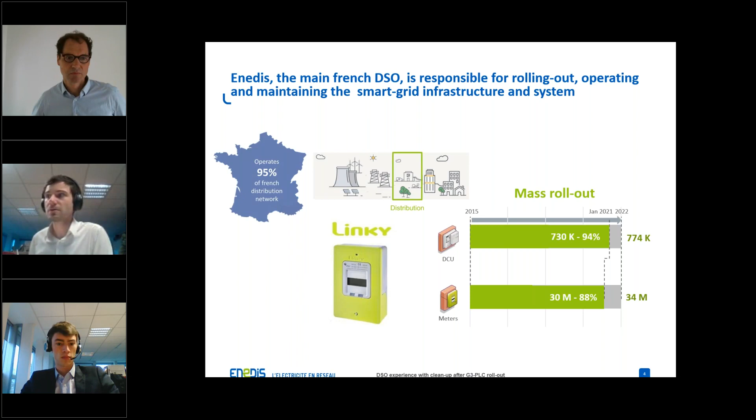Yes, so we have a specific Linky information system. It's not MDMS or HES that you can find on the market. We designed this AMI. It is custom made by Enedis, and all the DCUs communicate with the mobile network. So it's a UMTS or LTE communication.

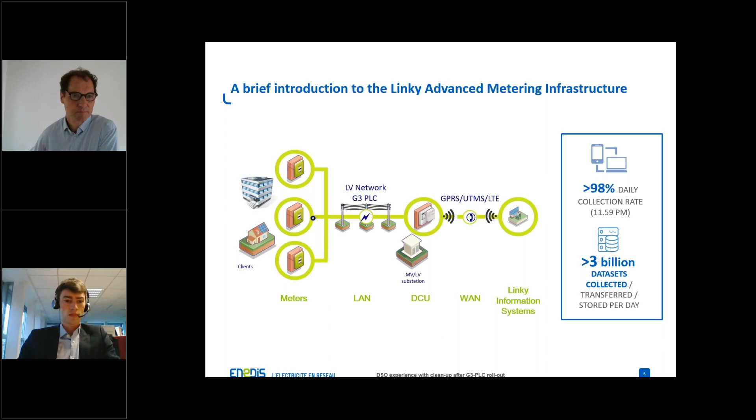We have on average 50 meters per DCU, and the biggest cluster we have reaches 1,200 meters. So it's quite a big, important cluster, and it works fine. So now let's talk about problem solving on PLC networks.

We have 2 steps. The first one is monitoring and analysis. We have several supervision teams which analyze and try to solve issues remotely. They don't have to go on the field, but they have more options. And if needed, they can request an intervention.

And so the second step is on-field intervention. You need to get your hands dirty, and if the PLC issue is very specific, we ask for a PLC technician to investigate with advanced tools.

So on the next slide, you can see Linky SUP, which is a dedicated tool to detect and treat incidents. Most of the incidents can be treated automatically by the software. You can run actions like firmware updates, reboots, meter kicks.

And the objective is to provide the supervisor all the information to investigate. For example, the cartography, customer information, meter status, etc. From this software, you can send the case to the right service. And for this case, you can send it to the PLC technicians.

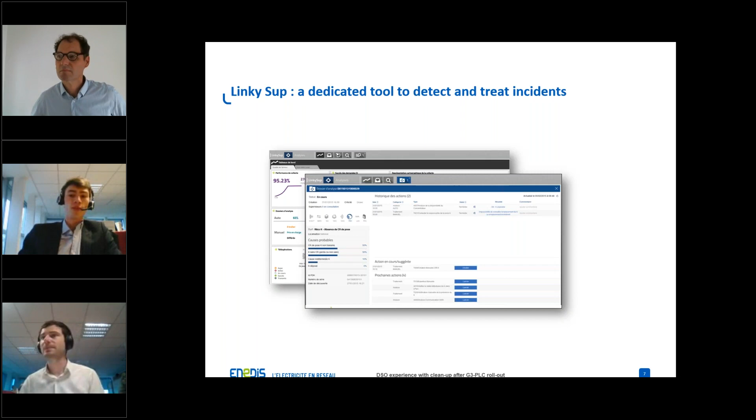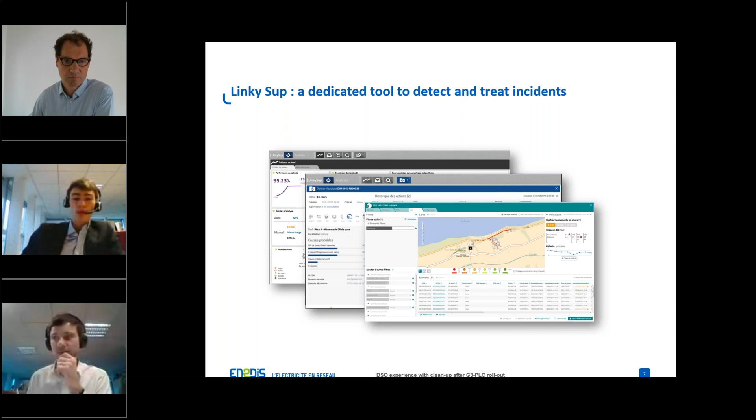All right, Leon, if you can go on the next slide. So the second part is the on-field intervention. For the on-field intervention we have about 60 local technicians for the whole French territory. There are around 1 or 2 persons in each regional office, but they are all working part-time on this activity.

The technicians are identified within the Enedis workforce, originally not specialized in telecommunication. They are mainly customer, network or metering technicians. It's a career opportunity for them to be trained on PLC. So the training is in-house.

We have a 3-day training for all the PLC technicians, where they learn theory and practice about PLC. They practice on an experimental network to learn how to search for and find the noises. The training started shortly after the rollout in 2016. It was a little bit early because technicians had time to forget. So the main advice is to do it as close as possible to the occurrence of the first issue on your system.

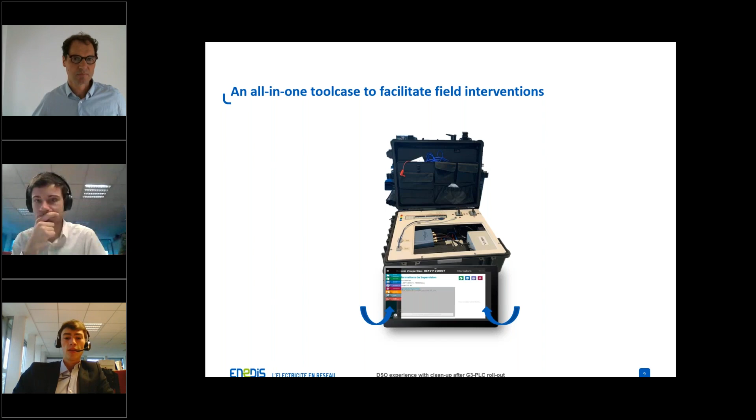Can you go on the next slide, Leon, please, on the tool case? So all the technicians are equipped with a tool case that we designed. It's equipped with 2 tools that are available on the market, an oscilloscope that allows us to make spectrum measurements, and a PLC sniffer. We chose the N-box tool from Neuroncoms. They are both needed to measure and analyze PLC communications.

The PicoScope is more used to make instantaneous measures, to measure the noise, to find it. And the sniffer is used to capture and understand the traffic, allowing in-depth analysis, studies and application. And to complete this tool case, we have a tablet that allows the technician to manage the intervention and to see the measurements directly on the screen.

All right, now that we've seen how we are organized, Thibaut will start to present a first case study. So the first case was in Évry, which is a city near Paris. In the same neighborhood, we had 7 substations with low performance. And so we decided to go on the field because everything was fine with the DCU. So we tried to investigate this neighborhood.

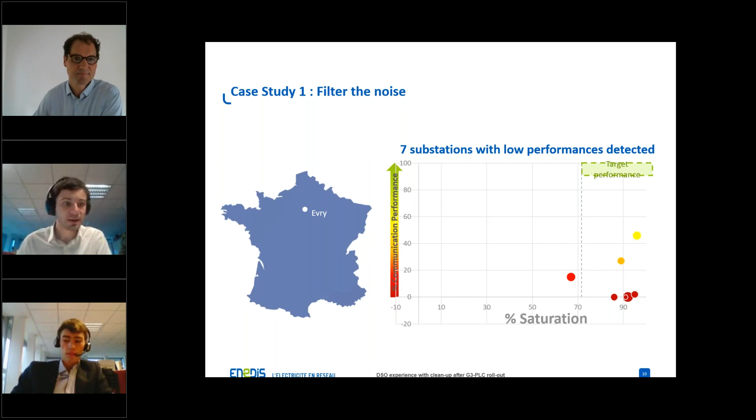So on the next slide, you can see the cartography of one of the substations. It's collective housing. Évry is a big city with big buildings. And we checked all the information on the GIS, and we found a lot of boiler rooms for collective heating. So it was the first clue for us, because we try to find big customers that can interfere with the PLC. And so we went on the field.

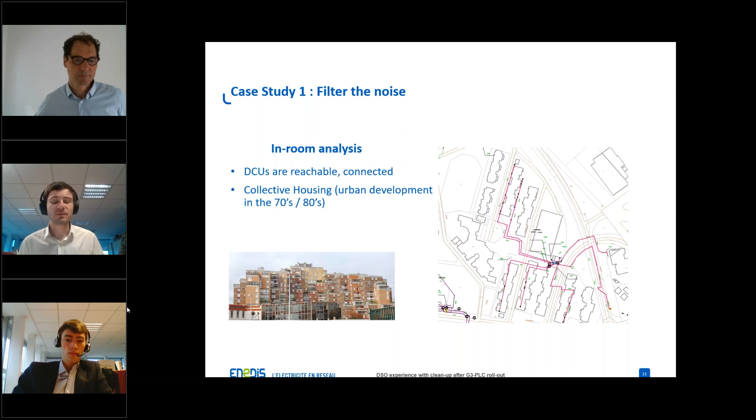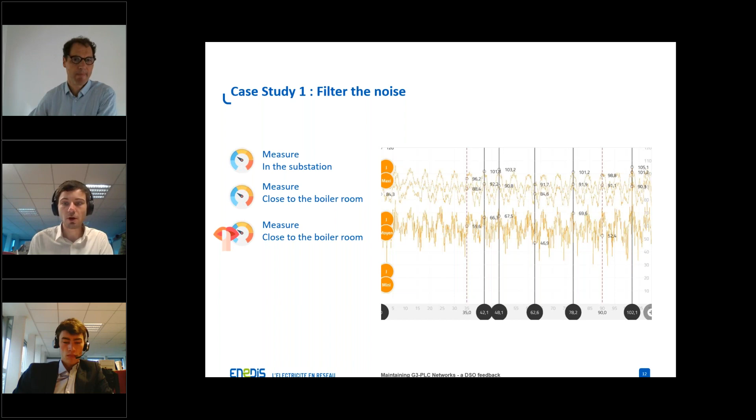So then we go closer and closer. We try to find the origin of the noise. And so we went to the boiler room, and we could see that the noise was more powerful. So the next thing to do is to find the technician of the boiler room and try to disconnect it to confirm that the noise perturbation was the boiler room.

And so the noise disappeared, and we tried to discuss with them, and we found out that the company disconnected the low pass filter behind the frequency variator. So we asked them to reconnect it in all the neighborhood, and so the performances went up.

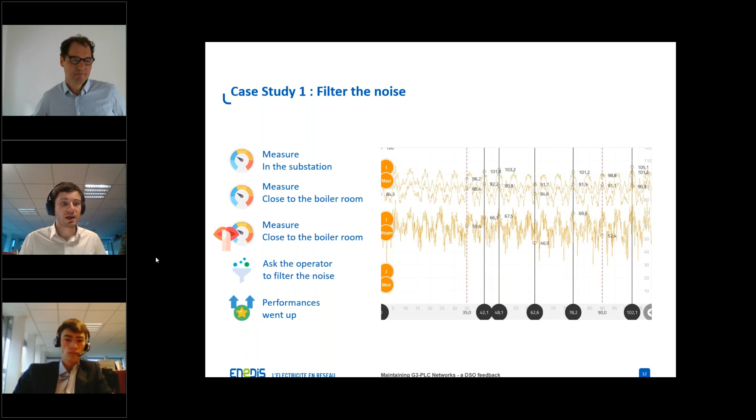And so here it's important for us to say that for the filters, we don't give them the filters. We just ask them to disconnect, to replace, or to filter the equipment if necessary. We don't pay them for that, so we need to be convincing with the customer, because if they don't want to filter the noise or to remove the equipment, we can't do anything else. And so the next case study will be given to you by Rémi.

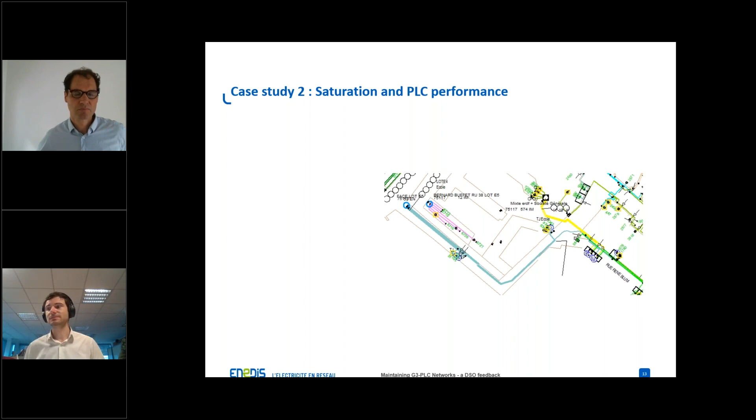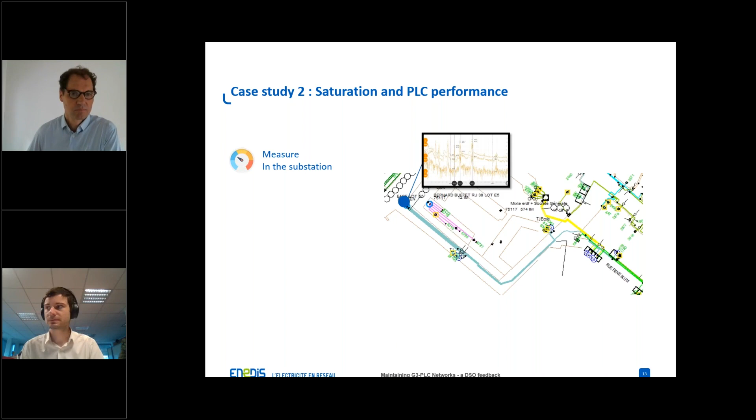Well, on this second case study, the methodology to find the noise is quite the same as the previous one. So we first do the measure in the substation, where we can identify low power noise. Then we have two feeders. We searched for noise on the two feeders, and found that the noise is located in a school that has solar panels, I think. So we perform a measure on the second feeder too.

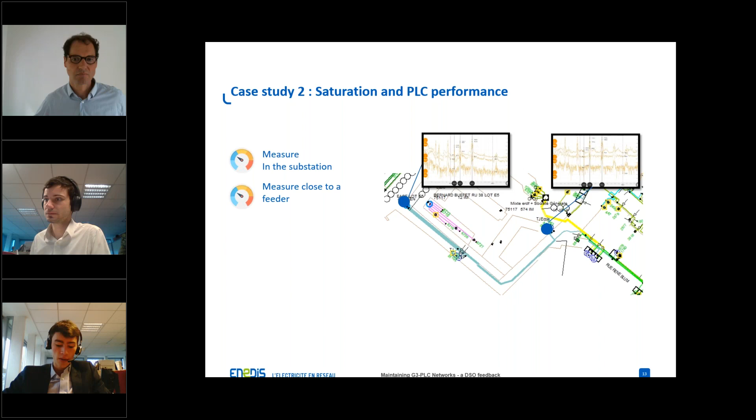And the solution in this case is not to remove the noise or to deal with the school administration, but more about our system, because the solution is to increase the number of PLC meters on the network. Here in this case, we had some older meters that were not replaced, so we changed them to improve the saturation of the network, and the performance went up.

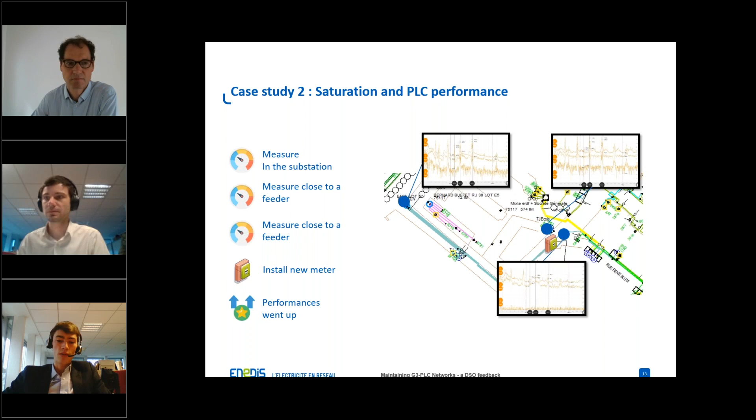Actually, we have a lot of cases where if we only install the meters on the field, we solve a noise problem, because the meters we have have a good noise immunity level. We ensure that we have good meters with laboratory tests, and we have a minimum immunity level to reach to buy the meters from the manufacturer. So just simply with the deployment, we increase the saturation and we improve our performances.

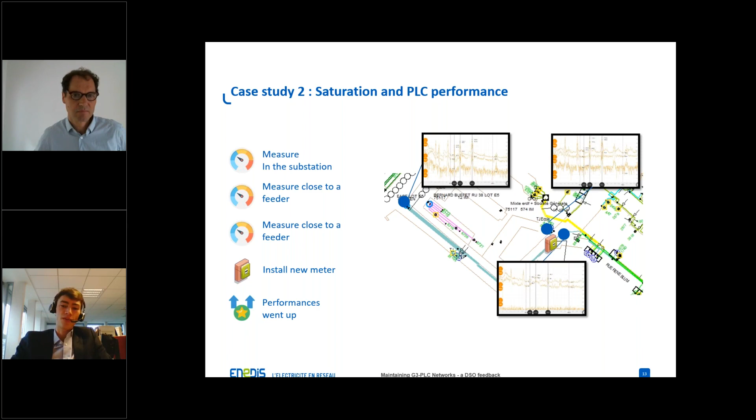Rémi, I had just a short question to you still. I understand in the last example, yes, the problem was caused by a solar panel, but you didn't have to install any filters there, correct? Yes, correct. We just put more meters, replaced older meters. Okay. We don't need any filter for this installation.

One of the questions we received, Rémi, is can you elaborate a little bit on your objectives in Enedis, on the target KPIs in terms of readings and reachability, and how you got there? Well, our main KPI is the number of meters for which we have an index. We read a daily index on each meter, and this is the main KPI. So our system is built to gather as much as possible of the consumption index each day.

Most of the time, the index is read on the meter during the night, where we have lower problems of noise on PLC. But there are several retries during the day, so it's important to build your system around your KPIs. We also perform different services on the meters, such as contract configuration and so on. We also have KPIs on these operations, but the SLA is up to 24 hours, so we sometimes have to retry operations on the communication chain.

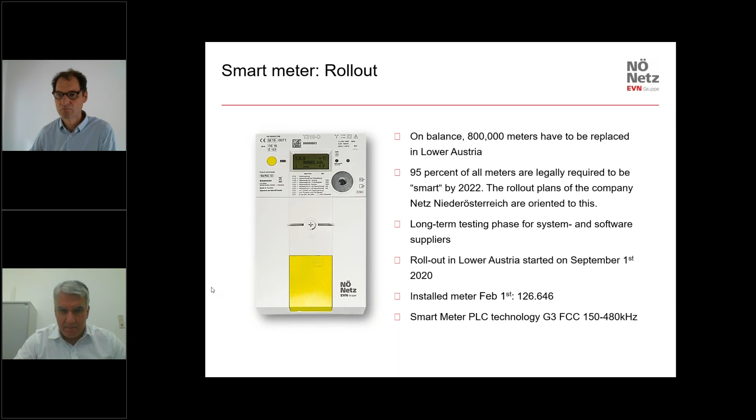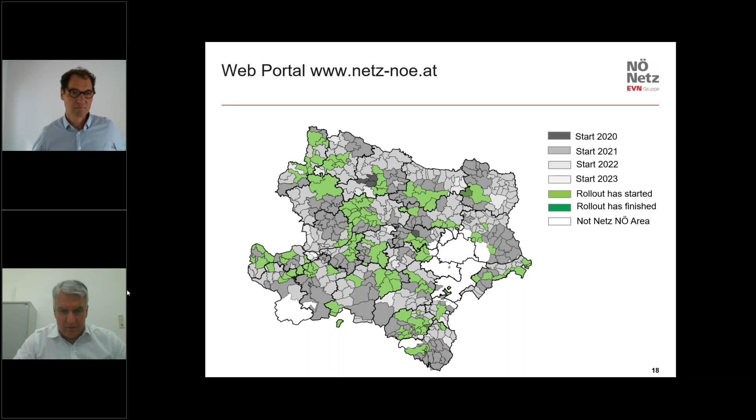On our web portal, every customer can see what is the status of the rollout, when his region will be, when we will start there, and so on. And we have different colors. If it's dark green, then the rollout has finished. But it's going very well. Next slide, please.

What is our smart meter infrastructure? Our central systems, the head-end system and the MDM system, come from Sagemcom. We have two different meter vendors, Sagemcom and Piper. The leading system is our billing system, the SAP system,

and we think that we can reach minimum 95% of the meters with PLC, and for a small amount of meters we also plan to install a point-to-point meter infrastructure. The customer can see on the web portal every day his consumption from the day before. In the past we had yearly billing; with the smart meter we will change, if the customer wants this, to monthly billing. Okay, next slide.

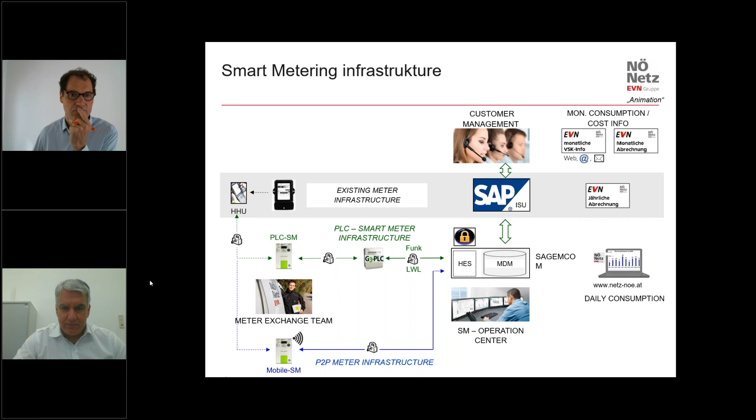Okay, so we have three examples prepared, and before we tell you, we want to explain what devices we are using in EVN. For the measurements, we use the PLT M1503 device with a notebook to evaluate the results. And what training did our technicians get?

We have 23 service centers where we have one technician in the field. They got 1 day of basic training about the procedure of PLC measurement, organizational stuff, documentation, and so on. They also got a short training during the handover of the equipment, so how to use the PLT measurement device and how to see the results on the notebook.

Then the technicians go to the field alone, but they always receive support remotely from the operation center team. And for bigger measurements in the field, we have 3 experts in our department, who also support the colleagues in the field. When we go to the next slide, we have our first example.

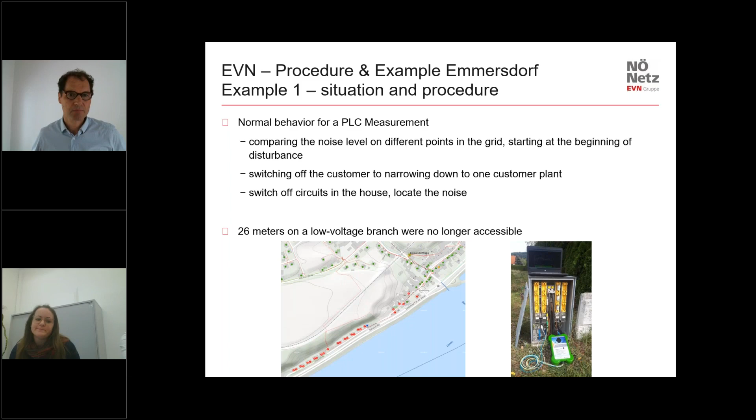For our first example, you can see in this picture we have 26 meters on 1 low voltage branch which we cannot reach. You see the red points. On the next slide, you see 1 to 7. These are the points where the technician has done a PLC measurement with the PLT device. So they started at point 1, measured other points, and compared the noise level.

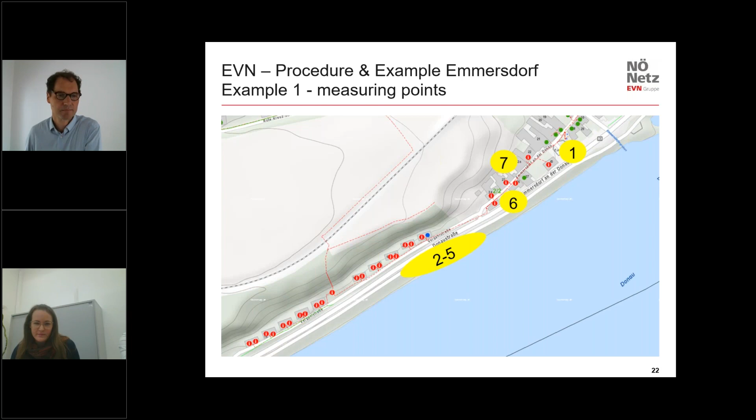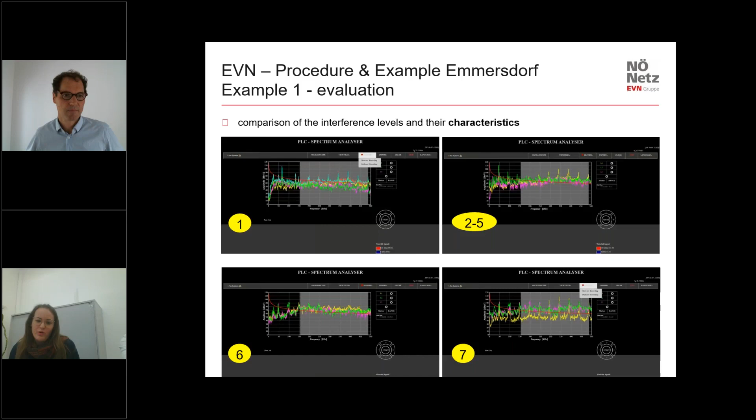And on the next slide, you can see that the technician installed a PLC socket filter. And on the next day, we saw that the meter was reachable again.

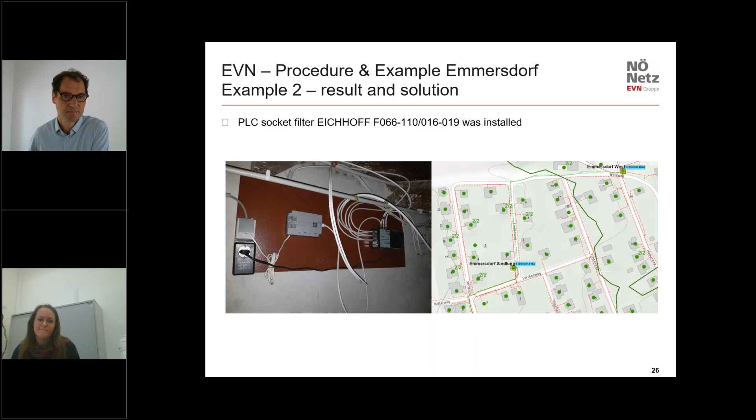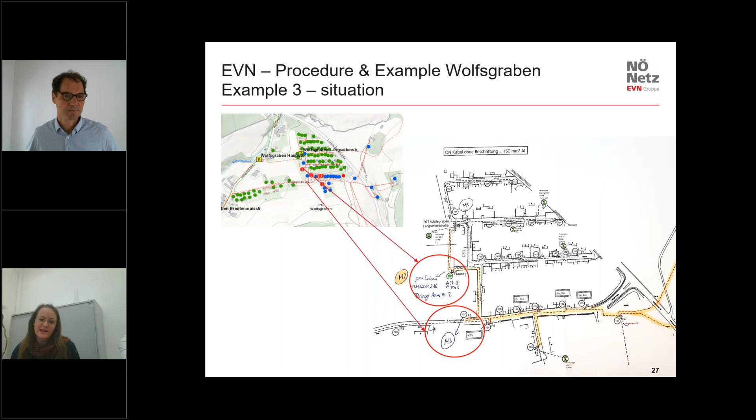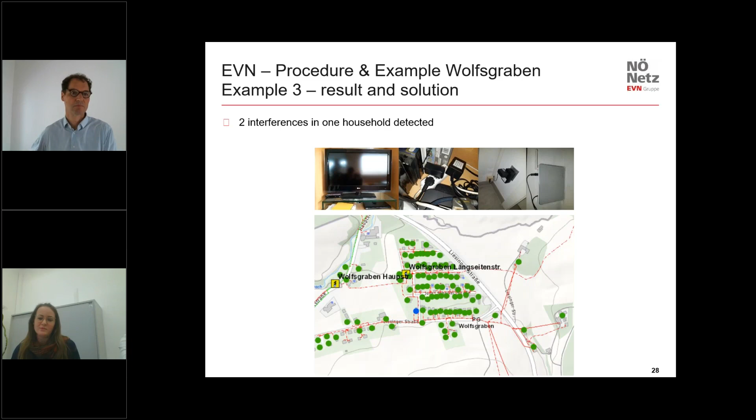This was electronic and a WLAN router. And we installed 2 PLC socket filters also in this house. And on the next day, the complete branch was really reachable again. When you go to the next slide.

In the case the customer has issues because of our PLC grid or the smart meter installation, normally we don't install a filter. We always ask the customer how often he has issues, does the device have a CE mark and so on. We can reach the meter, but the customer has an issue, so normally the customer has a defective device in his house. Yeah. Yes, next slide, please.

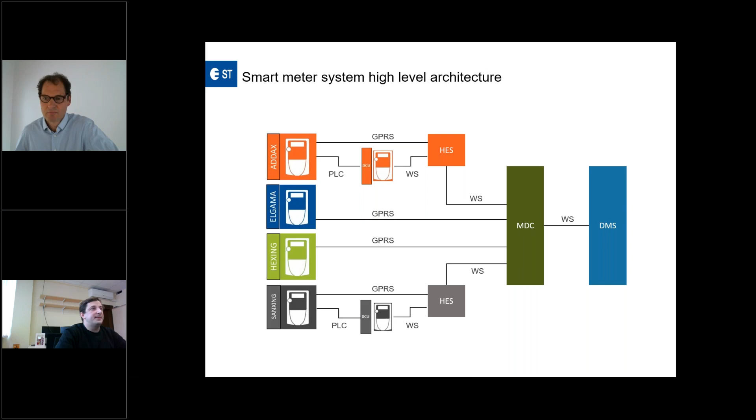The second case is disturbances from telecommunication providers' power supply blocks, and the telecommunication suppliers replace these blocks themselves. So we just need to identify where the issue is, and everything goes fine with that. Please, next slide.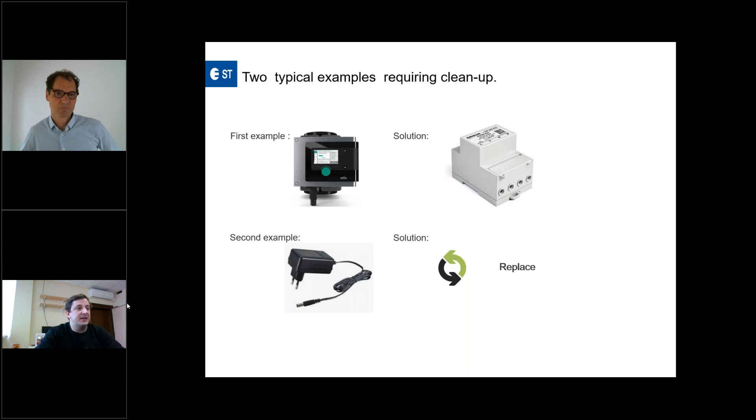For troubleshooting, if all meters on a substation are unreachable, first we measure noise in the substation to see what the noise looks like. Then we check the nearest distribution boxes, where we can see noise and identify directly the house the disturbance is coming from. The third step is to identify the client.

For troubleshooting, we use the MFA 500, a spectrum indicator, and for the most interesting cases, where we need to find issues, we use the Neuron toolbox sniffer. Please, the next slide.

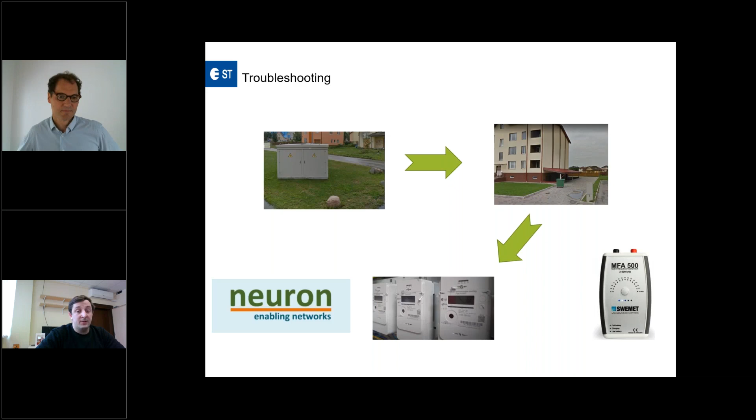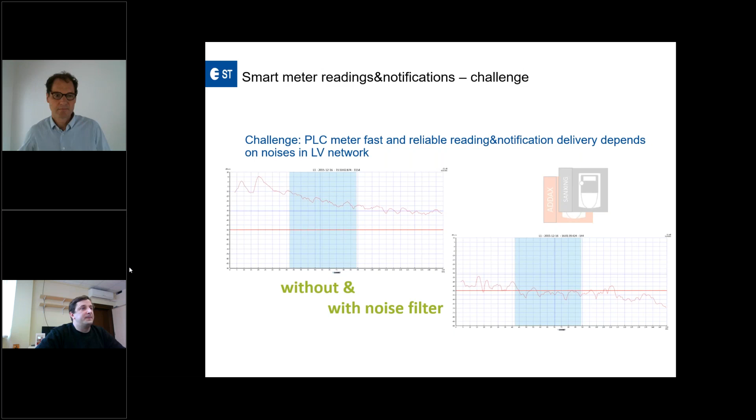And also there is a picture of the spectrum indicator MFA 500, where we can see how disturbances look. On the left side are the disturbances, and on the right side you see the disturbances with a filter, and we can read meters in these cases. Next slide.

So our troubleshooting team is 1 director, then a system architect, 2 system engineers who are responsible for MDM and FES, 2 system engineers who are responsible for security, and 1 DevOps engineer who develops new programs. I'll tell you later about this. And then for troubleshooting there are 2 smart meter senior engineers and 10 smart meter engineers. These are field engineers, so they go into the field and identify problems. So next slide.

How we got better: training. We had trainings with Swemet. This company not only sells equipment, but also gives good trainings and new tips on how to find disturbances in the network. Then there were also trainings from Neuron, Trialog, and most important is our work experience. So we exchange our work experience and learn from what we have discovered and what we should do better. Next slide.

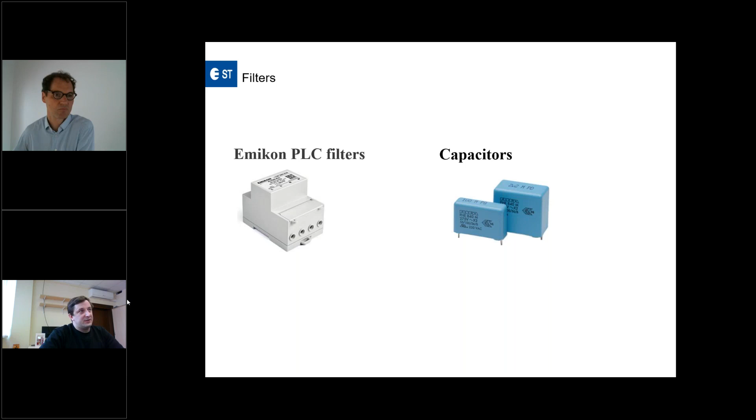For filters, we use G3-PLC Emikon filters. And we have also discovered that in some cases capacitors help. So we just install a capacitor and that is enough for the disturbance. Oh, thank you. Next slide.

And what we have learned is that we use analytics to solve problems remotely. So we have designed our own program. It's called Monta, where we can check our KPIs. Also, we can check failed devices when we see in the network if some DC doesn't work. So we can get information from these systems and also check reachability of devices.

And we also use GIS, a system where we can see meters on the map, so we can identify meters which aren't reachable. There was one case when we saw that 1 meter was unreachable, and saw there was also a telecommunication provider there, and we just called them and told them to please change the power supply blocks, and they changed them, and we saw that the meter started reading. So yeah, thank you.

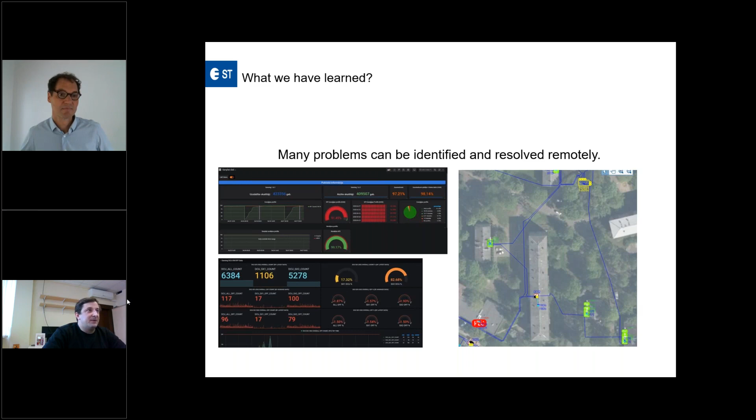Okay, thank you. Any questions? Well, I saw, Vilis, that you had different trainings from different companies for the PLC, and I also received a question about the content of the training given at Enedis regarding troubleshooting in PLC. Because of the time, I don't think we can go into details, but maybe I can share the content or topics covered in these different types of training with the participants of this webinar. So I will address that after the webinar and share some information on that. Yeah, of course.